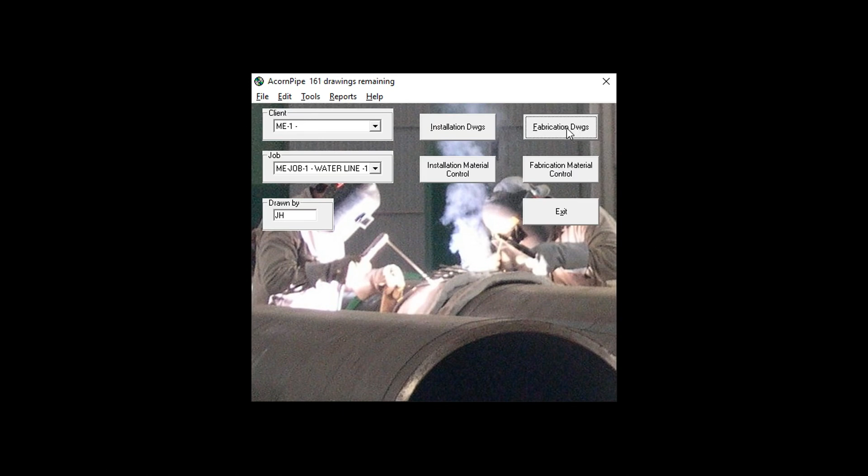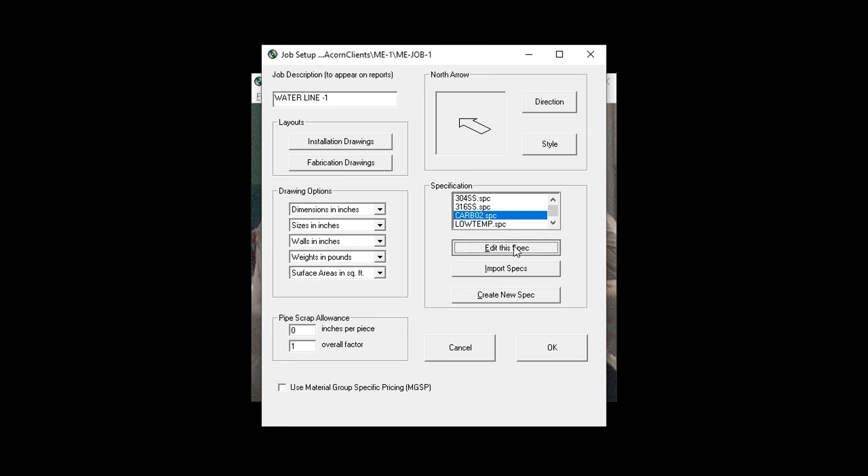Okay, so we created a job before, in another tutorial. I'm going to make some changes here to the spec that's in that job. Edit job spec setup. Now this is something that probably your supervisor would do rather than the operator. So it depends on what your position in this task is going to be. So I'm going to pick the CARB02, edit this spec, and we're going to try a bit of socket weld piping.

Normally, or in a lot of places, your socket weld piping will be the smaller piping, probably depending on where you are, 2" and below or 1.5" and below. And socket welds are a lot cheaper to fabricate, so they're popular for the lower pressure, lower specs.

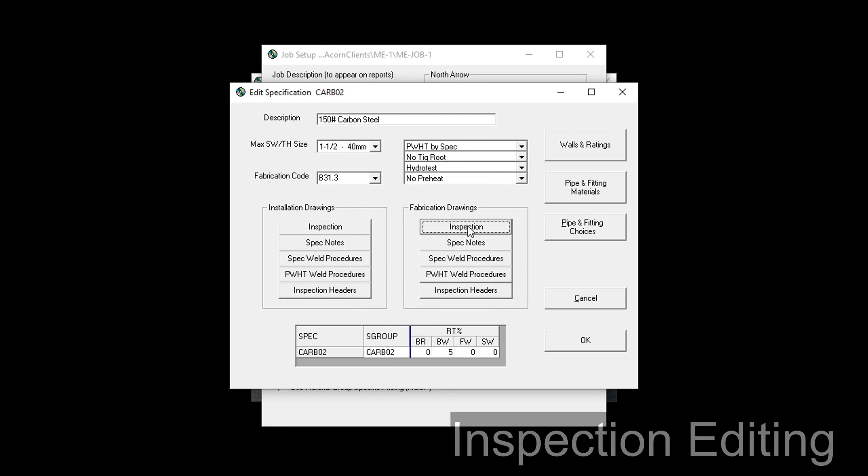So here, click on inspection here. This is something that we didn't do on the last job that we could have done. So inspection, this is going to be your X-ray. Now this is going to apply to everything. You're probably not going to be doing X-ray on your socket weld, although that's not always true. Sometimes they want to socket X-ray the gap.

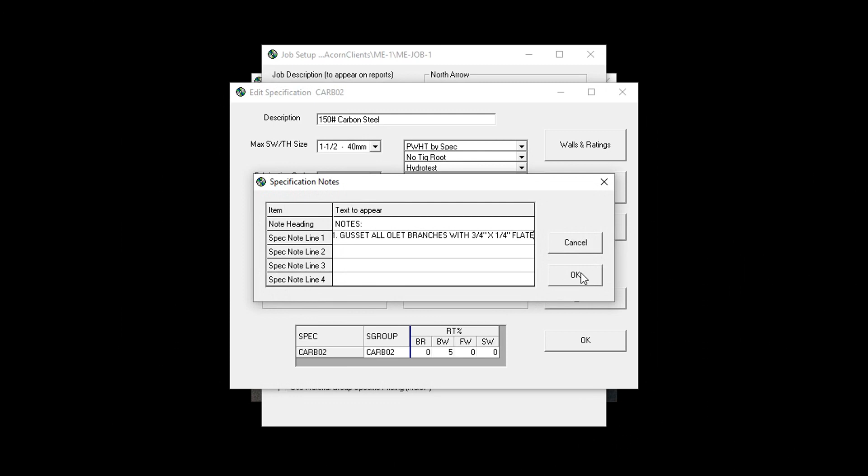So these are things that your specification or the company you're working for would decide for you. You put whatever notes you wanted in there. Spec weld procedures, the company would have determined that. Walls and ratings, generally this would probably be extra strong in most specs. So if we want, we can change that to extra strong.

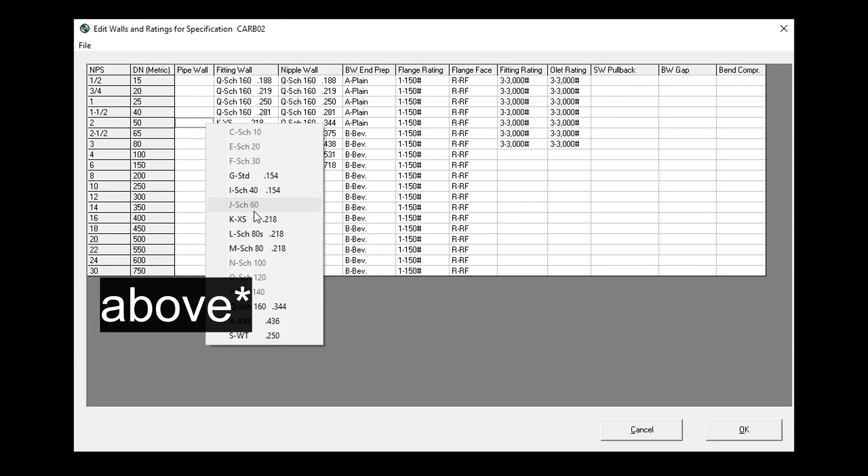Or if you want, you can clear all that. Everything above the size you click will become that. And again, this is probably something your supervisor would do rather than you. And your fitting walls would match your pipe.

Pipe and fitting choices. Most places are not going to be drawing threaded fittings in their shop drawings, but some would. Cross is very uncommon. You can see all your options here.

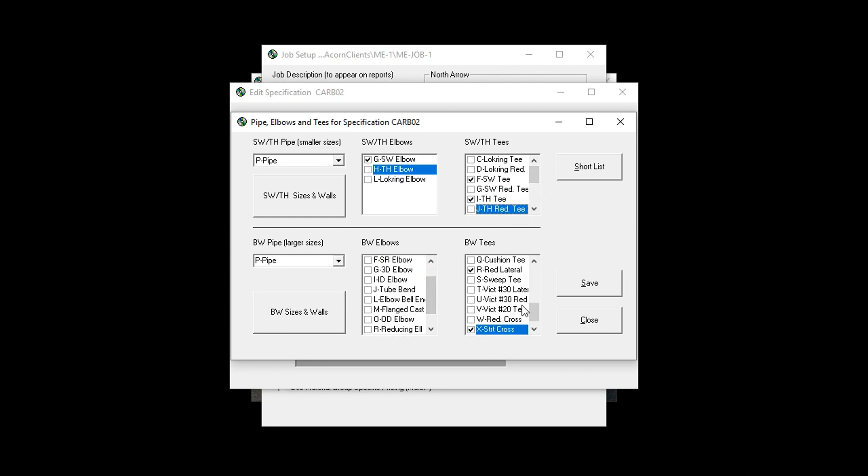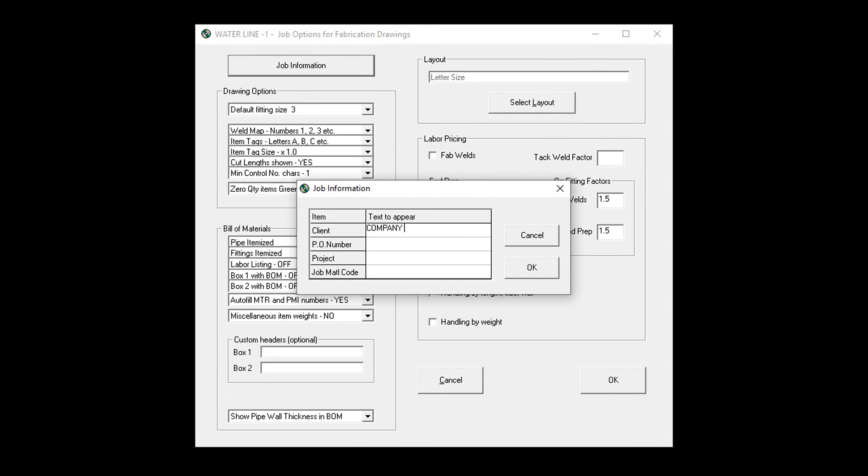Fabrication drawings. We go in here, we can put in the job information. This is all stuff that's done at the beginning of the job, and you wouldn't have to bother with it after that. Okay, so that's some spec setup stuff. So we're going to go in here.

Now, if your design pressures and information are the same on every drawing, or going to be similar, you can relabel a drawing, but that can be a little bit dangerous because you might overwrite a drawing that's already there. So maybe it would be better if we start out fresh.

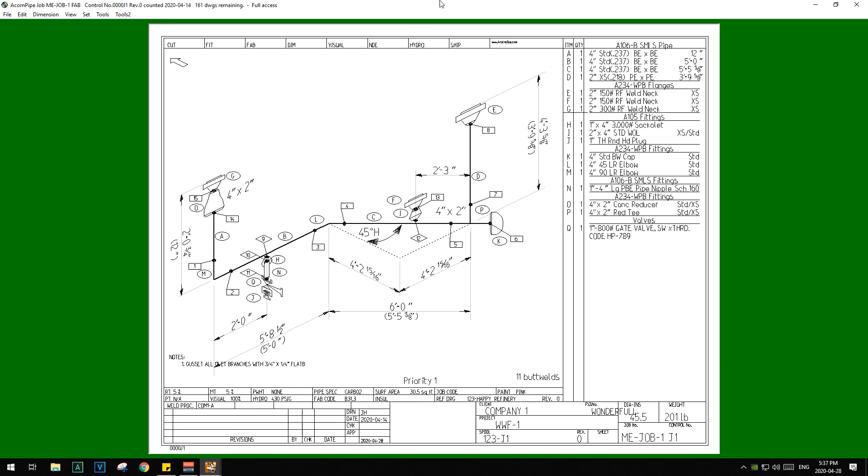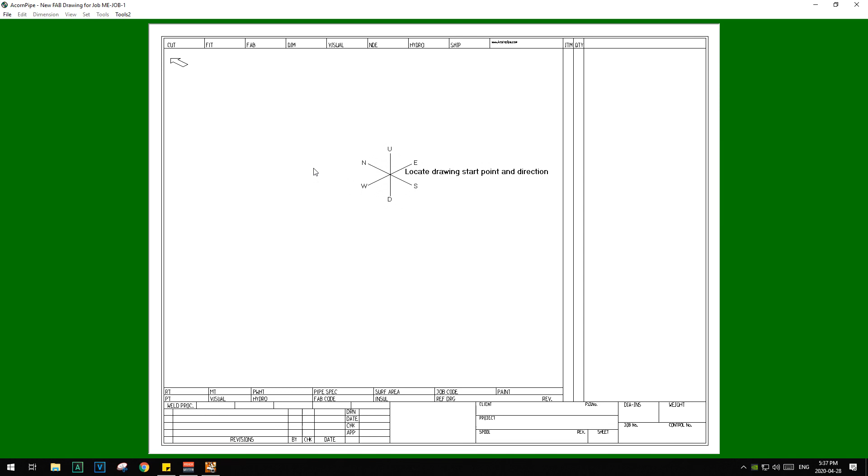So again, we can locate our starting point with the arrow keys. If you want to go on diagonals, you can use the keypad 1, 9, 7, or 3 to run on angles, or 2, 8, 4, or 6 to go horizontally, vertically. You can change your location later, but it's just a general starting point you pick. Once you're happy with that, you press enter. And now it's asking what direction we want to go.

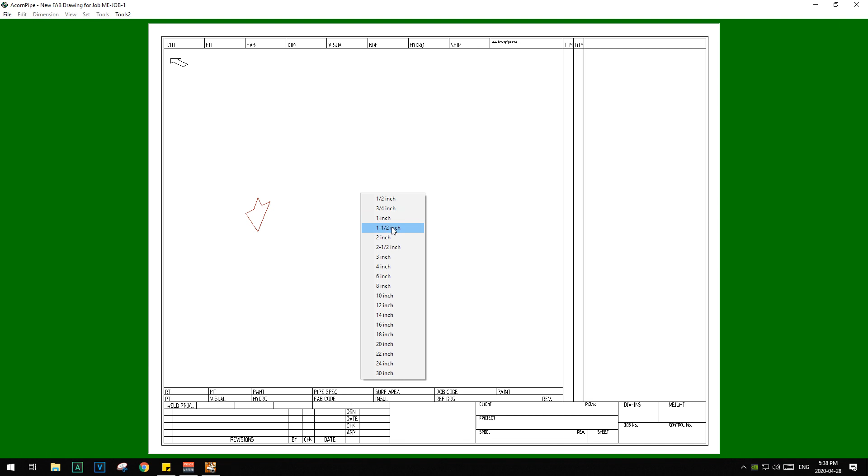We say down. Because this is a completely new drawing, it's asking us which of the specs in the job we want to use. I select that one by clicking the left mouse button. And I'm going to draw in socket weld, so I'm going to start with 1.5" because 2" and above will be butt weld. And again, I'm going to start with a socket weld. It says here socket weld threaded flange, so both options are going to be there when you pick that.

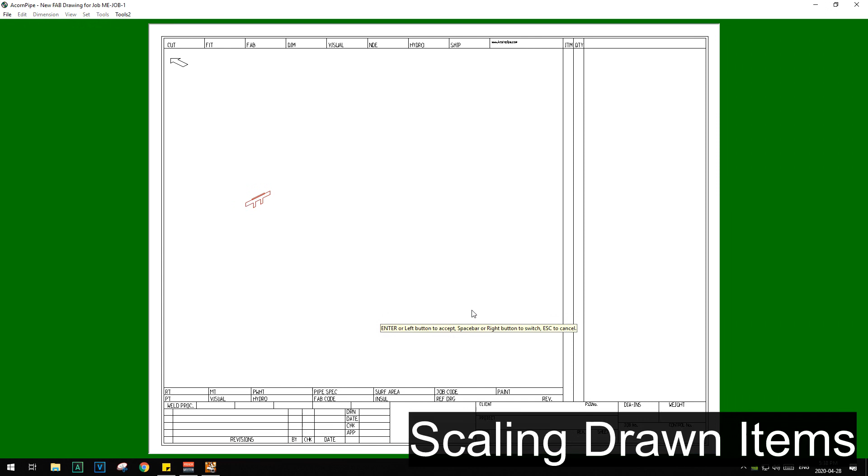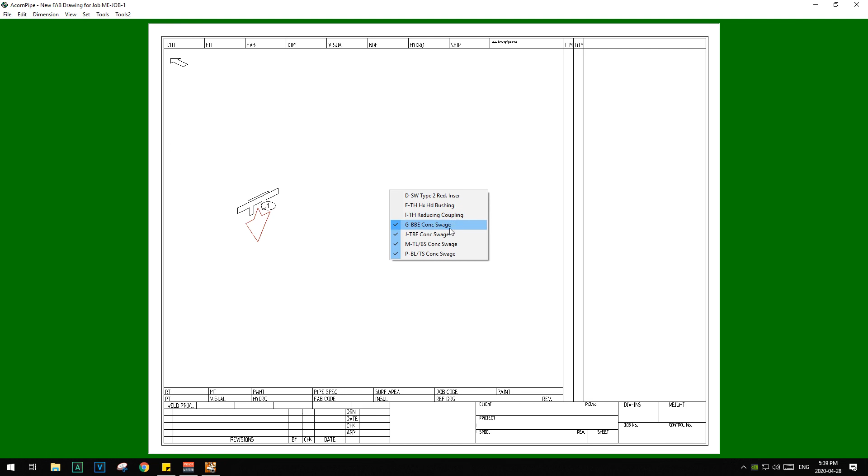So now I'm going to pick socket weld. And I can hold the shift button, up arrow to increase the size, or down arrow to decrease the size of that flange. Reducer. Generally, your fittings are all going to have plain ends in socket weld piping. Now, I don't see a plain both ends swage here, which is what I wanted.

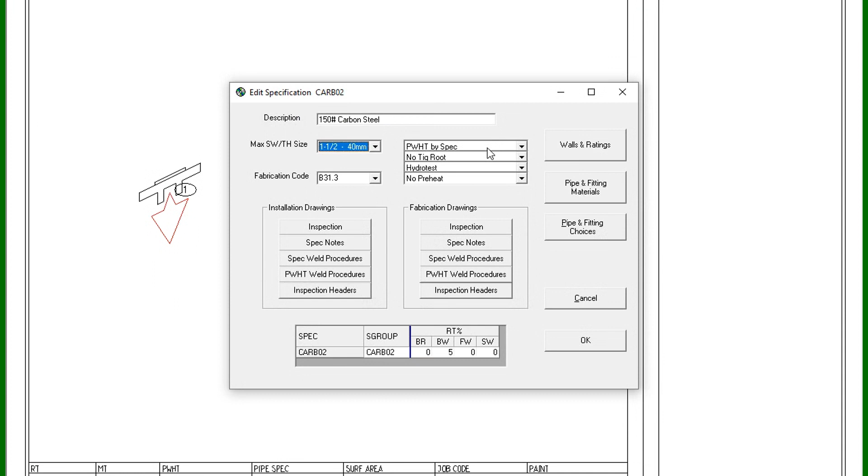So I can go and add that to my spec now without leaving the drawing, and go Tools, Specification, Edit Current Spec. And then I can go into Pipe and Fitting Choices. Swage will be under Reducers. Sometimes where you would expect it to be, like under socket weld threaded reducers, you'll find the item you're looking for is actually under the Buttweld items.

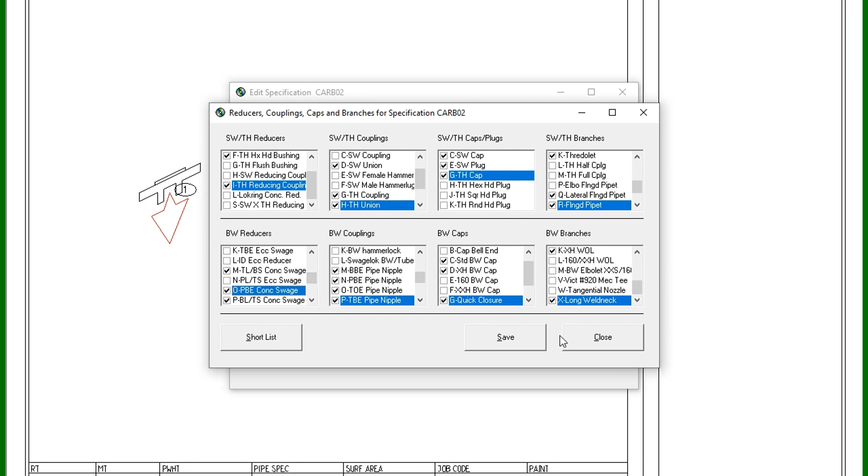So here I'm looking for a plain both end concentric swage. So if I click that, that'll then be offered to me in future in this spec. Save, close, close. Yes, okay. Now another thing I could have done if I didn't want to add it to the spec is just go Edit Off-spec and say all fitting choices. And then for that one command, it would be offered to me. But now I've added it to the spec, it'll be in there permanently.

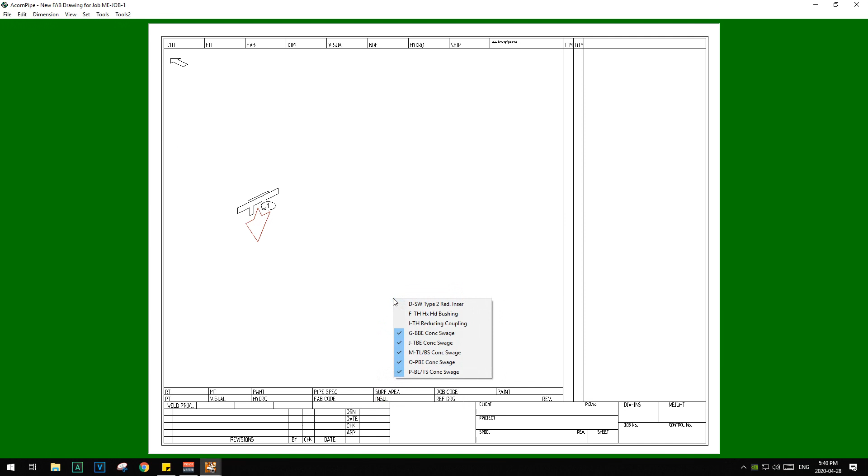And again, I pick Reducer, and you can see now it's added the plain both end concentric swage as one of my choices. And so I've started at 1.5 inches. I'm going to go to 1 inch now. That swage ideally would fit inside the socket of the flange or close to it. So I can increase or decrease my size. And again, I can hit space bar if I want to change the orientation.

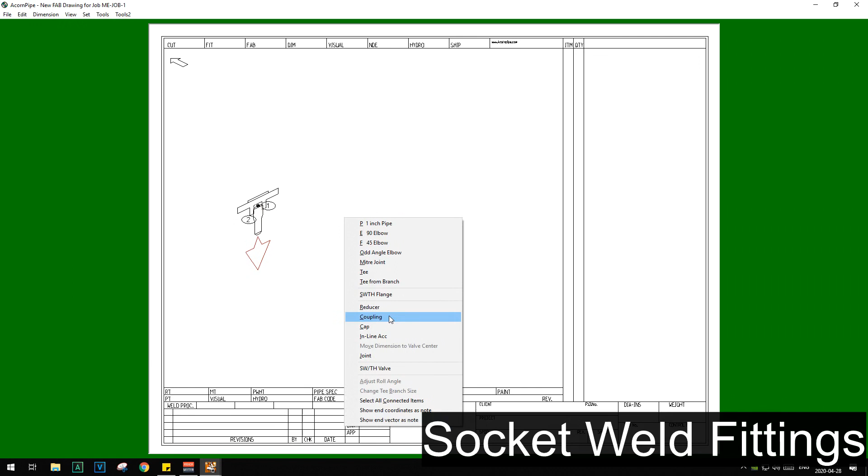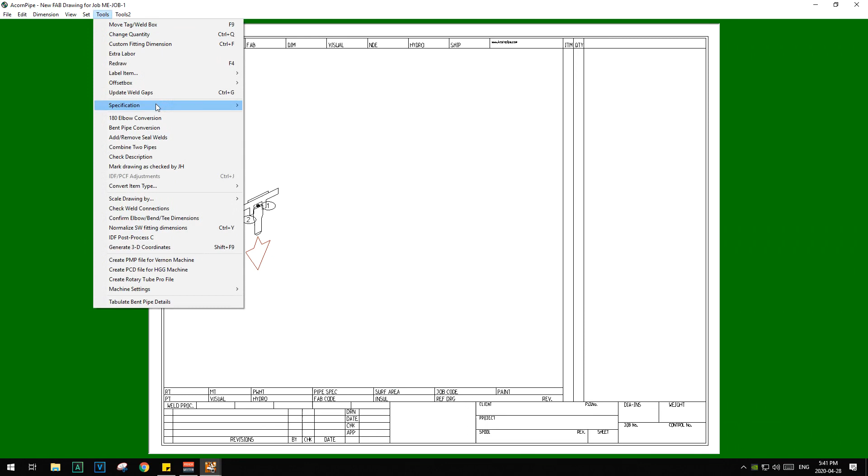With socket weld fittings, you need to be going into a socket generally. So if I'm going to draw some pipe after this, I can't just draw a pipe off the swage according to most of the specifications. I'd have to pick a coupling. Okay, this isn't set up. So again, I can go Tools, Specification, Edit Current Spec, Pipe and Fitting Choices, Reducers, Couplings, Socket Weld Coupling. Okay, save.

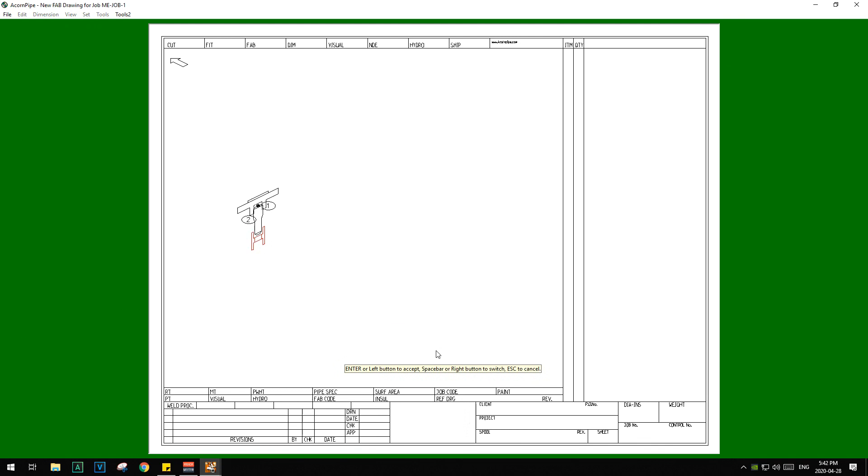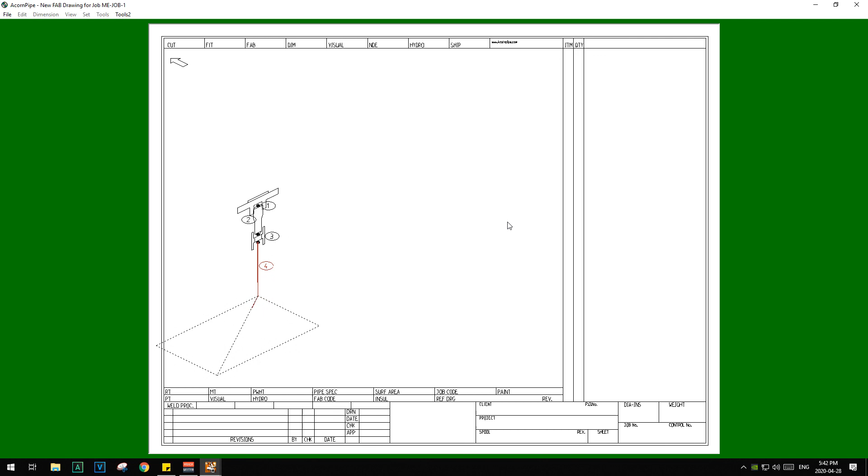Okay, now when I pick coupling, socket weld coupling is an option there. And I'm going to draw some pipe. I'm going to go with a 90-degree elbow, which I can orient at 90-degree increments by hitting spacebar. And if I've gone through all those choices and I'm not happy, I just continue pressing spacebar, and it adds in 45-degree increments to my choices.

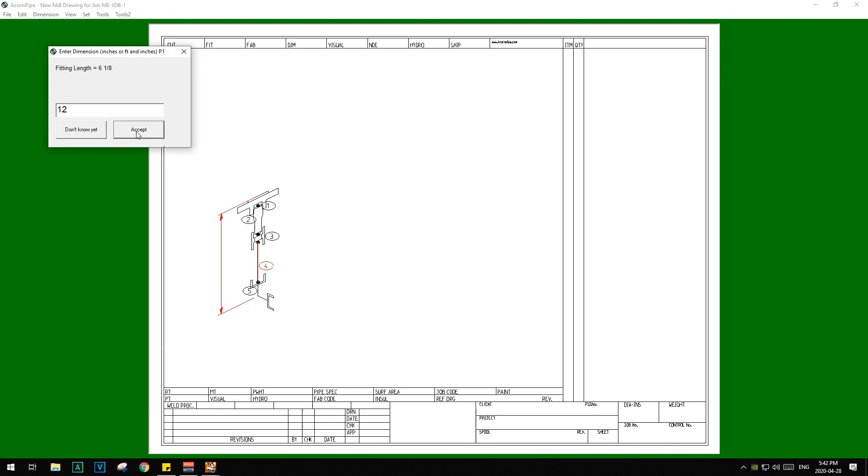And then when I'm happy with the choice, I press enter. It's now asking me for a dimension. And up here it shows me what those fittings add up to without pipe. I'm just going to say 12 inches is my overall dimension. And you see it subtracted the fittings, and it's determined I need 5 7/8 worth of pipe to get an overall dimension of 12 inches. Pipe, pipe. Because there's socket weld elbows, I don't need a coupling to do that.

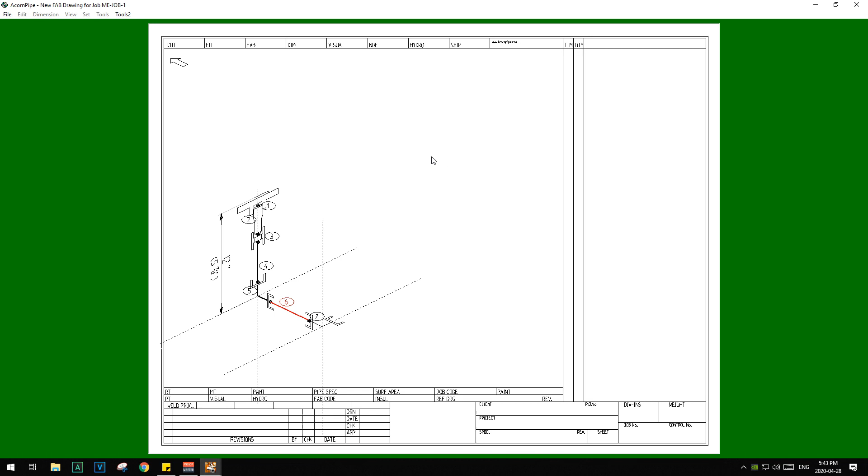Say I wanted to go from socket weld to a butt weld size. I have to put my coupling in here. And now when I pick reducer, I'll see what my choices are. What I'm looking for is a beveled large, plain small end reducer, which is not there. So I'm going to go Tools, Specification, Edit Current Spec.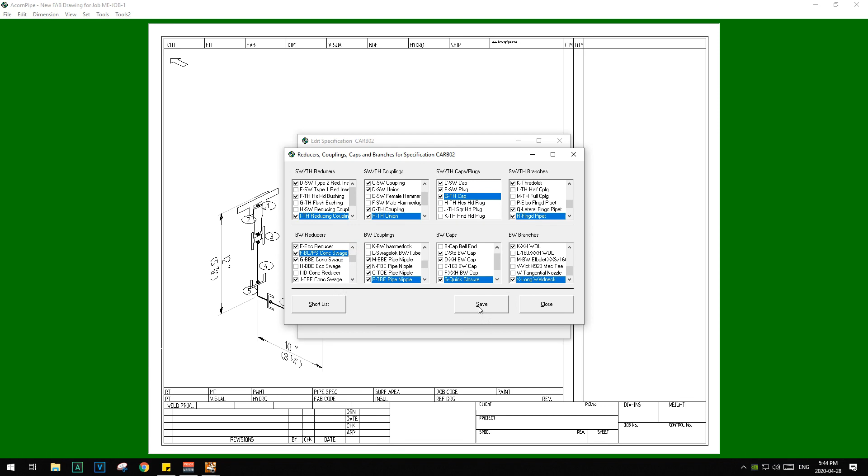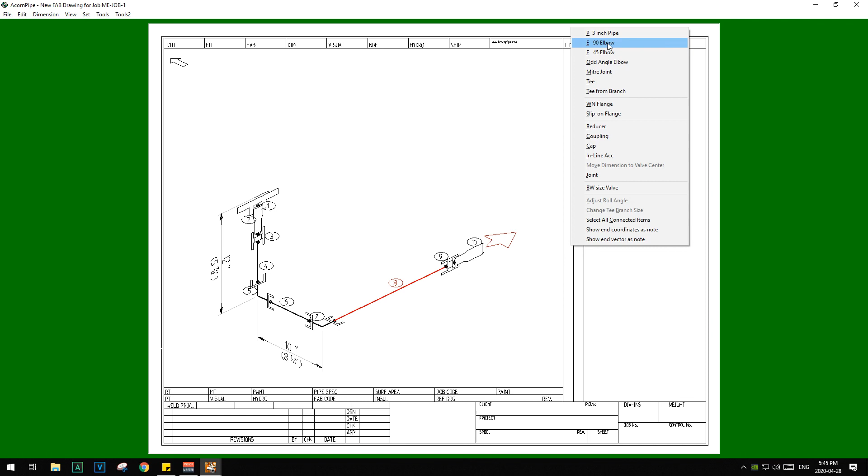Let's say I'm going to go to 3-inch. And now when I pick a 90-degree elbow, because I set in my spec that 1.5 inches and below is socket weld, it knows that 2-inch and above is going to be butt weld. So it's automatically chosen a butt weld elbow for me. I'm going to hold shift and up arrow just to make that elbow look a little bigger. You don't have to do that. Some companies don't really care. Most companies wouldn't care.

Okay, so now I'm drawing in 3-inch. And if I were to draw a pipe, I wouldn't need a coupling because you don't need couplings with butt weld piping.

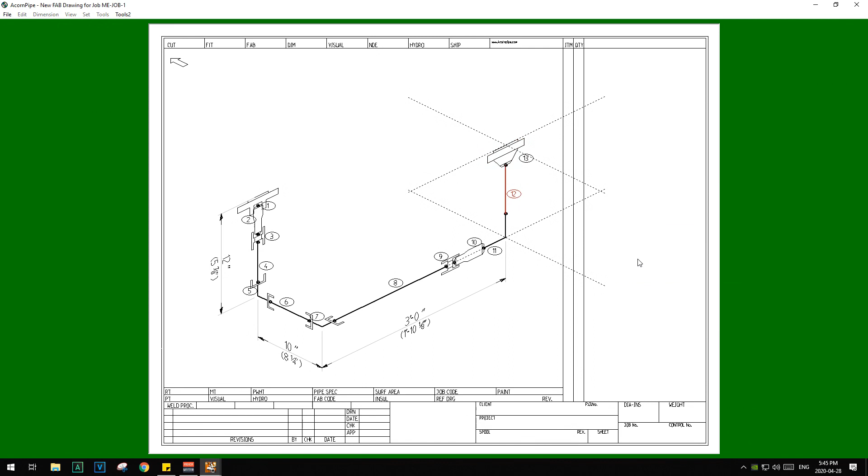Okay, so now if I go File, Resave, it says Resave, but it's actually the first time I'm saving it. So it knows that I've already used J1, so I'm changing it to J2. But just be careful there. It'll give you a warning if you're starting to overwrite a drawing. Always be careful if it's warning you that drawing already exists, as many a times drawings have been overwritten by accident. So pay attention to any warnings it gives.

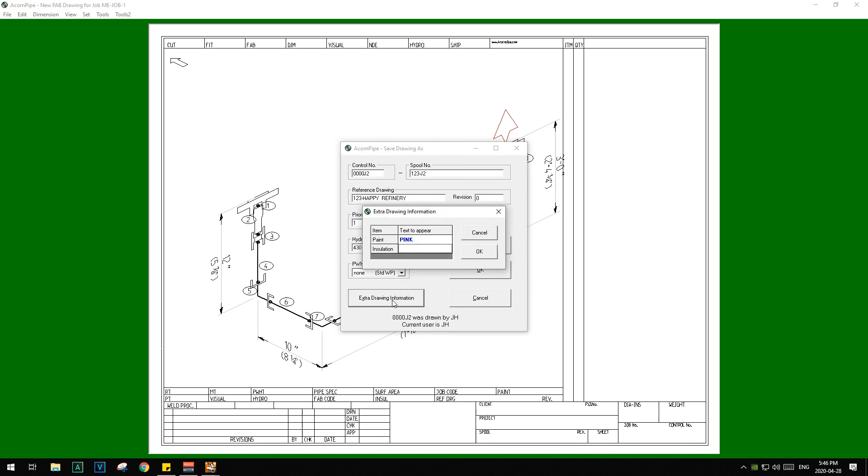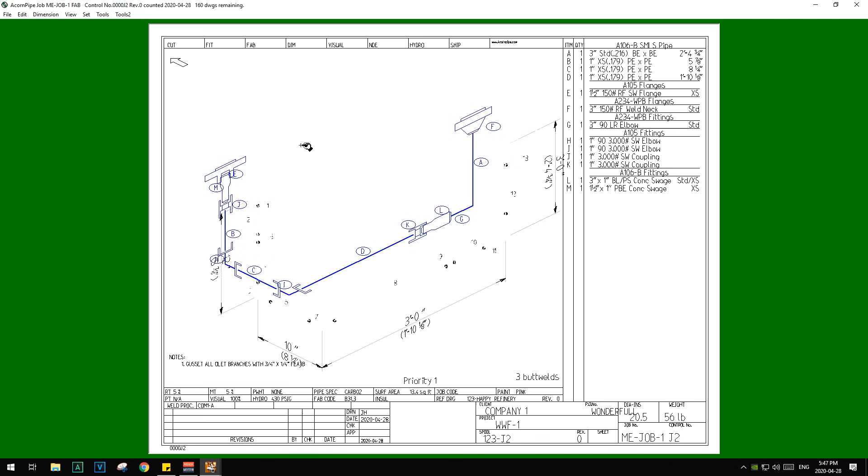Now, that's a little uncentered. So I can go Edit, select all of the above. And again, with my arrow keys, I can move it. By pressing 5 on the keyboard, I can make the moves bigger or smaller. And if I want to move the dimension line a little bit, I just click on the arrowhead. If I want to change what the dimension says, I click on the center of the dimension.

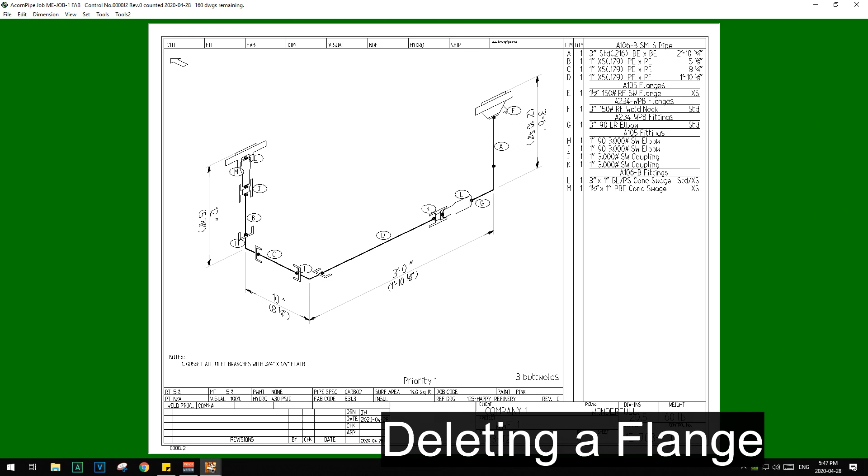Okay. So the cut length there is 2'10 3/4", and it's chosen 150-pound flanges in this spec. The overall length is 3'6". So let's see what happens if I want to delete that flange. Perhaps I meant to put a 300-pound flange there, not a 150, because I want it to go off spec.

If I use F11, see, the cursor becomes a hand here. So I can click on that item, click on the item bubble. You don't have to click on the flange, click on the item bubble, and then hit delete on your keypad. Now I'm going to go Edit, Off Spec, and I can change any of these things so that I will be prompted on the next command for what I want that's not per spec. So in this case, I'm going to change the flange rating.

Say done. Now when I click there and I pick weld neck flange, it's asking me what rating I want because it knows I'm going off spec. I'm going to say 300 pound.

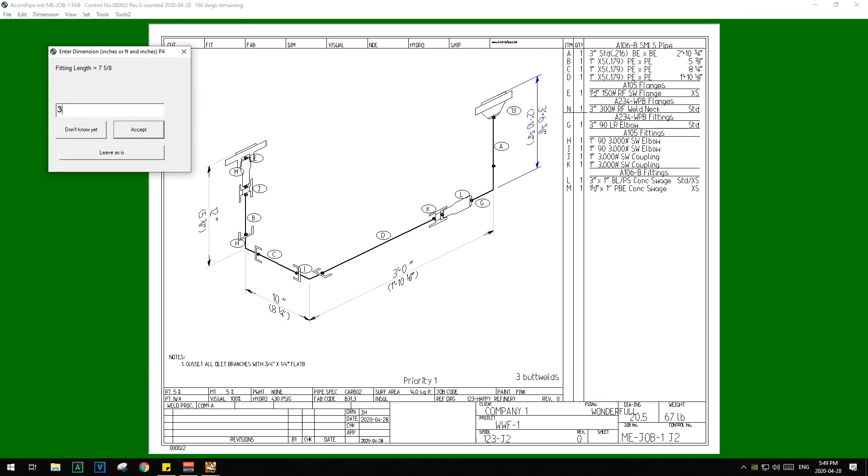Okay, so it's retained the cut length, but it's increased the overall dimension. So be careful there. If you do what I've just shown you there, it's going to keep the cut length the same, but your overall dimension is going to increase. So if you really did want the dimension you put in there originally, you'll have to change that to whatever you had originally. And myself, if I've got 2 different flange ratings on the drawing and it's out of spec, it helps to bring it to the attention of the guy in the shop.

Again, each company will probably have preferences on how they want to do these things. For the swage, I could call that out. Again, I move it with the keypad when it's in this state. And I can hold shift and increase or decrease the size of the text while it's in this state. I like to save my drawing once in a while, just in case things go bad.

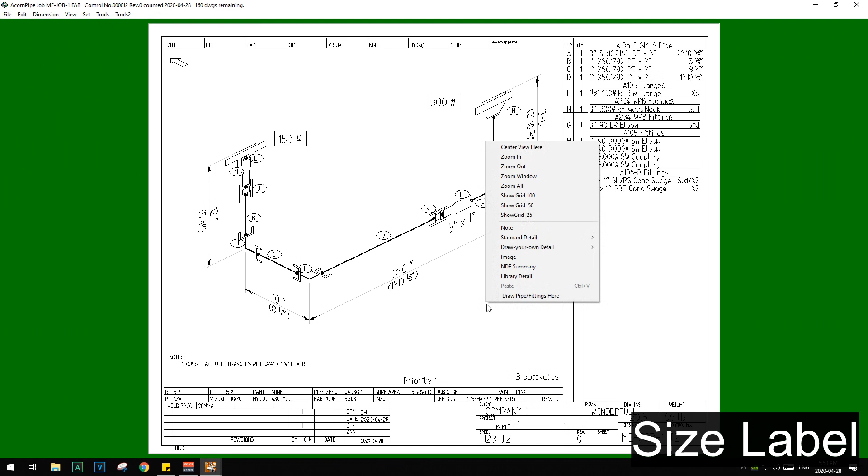So I did the note by just right-clicking on the screen somewhere and choosing Note. You could also call out the size of that reducer by going Tools, Label Item, Add Size Label. And then when I click on that item, it'll automatically come in with the size. In some cases, you might have to move things. F11 doesn't always move it. It seems to work with these notes if you want to move them.

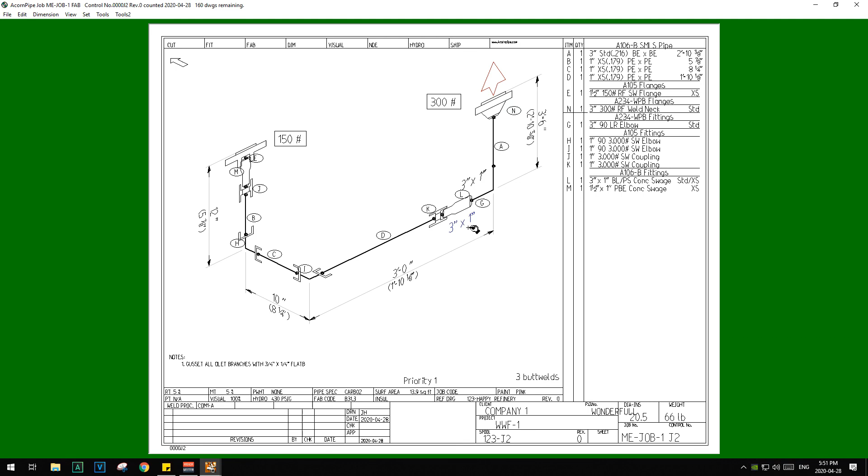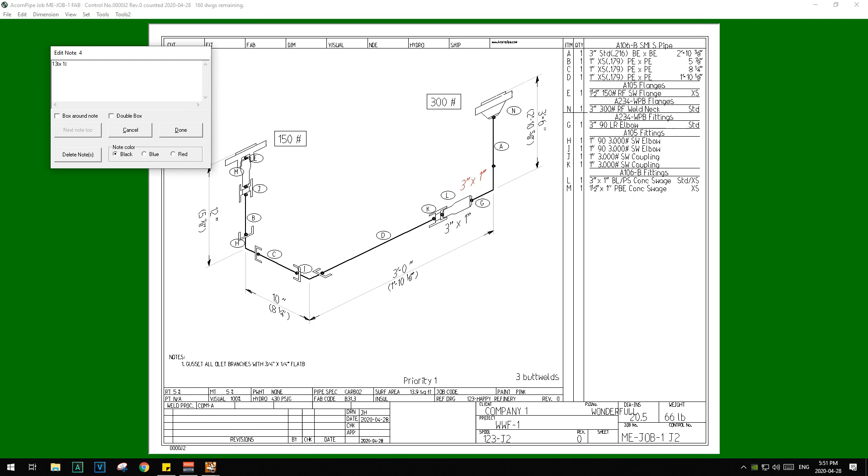But the note that was put in by the computer, first I'm going to move this bubble out of the way. Tools, Move Tag. Seems like the notes the computer put in, I had to hold Control and left mouse click to get that to come up. So sometimes it's easier just to type the text in.

Now let's just say I'm putting a branch on this. Socket-weld branch. 18 inches, or I could type 1'6". Now if I was to go 1'-6", see this change to the word calculate. So it's going to subtract 6 inches from 1 foot if I put that dash in there, okay? If I put 1'6" without the dash, it'll accept that.

So let's just say I had some long calculation. I could say 1'7" plus 3 space 3. No, I don't want to do this slash 3 point. So then it can calculate. Well, let's just say I'm going to add 3 inches. So it calculated that, accept.

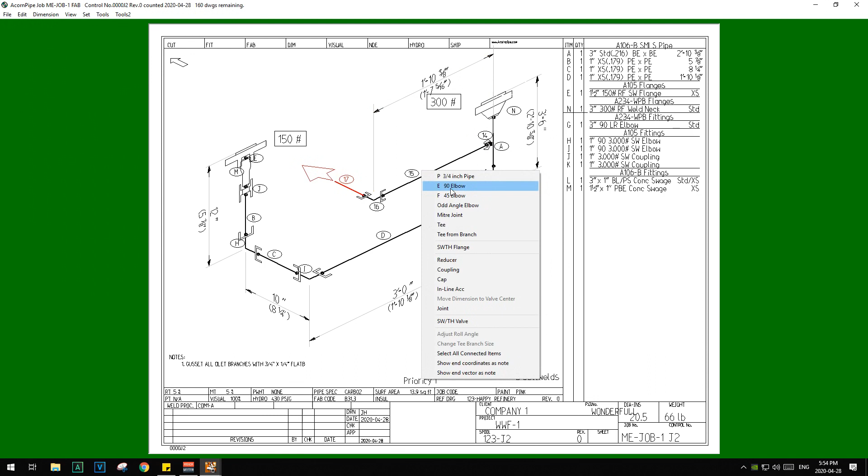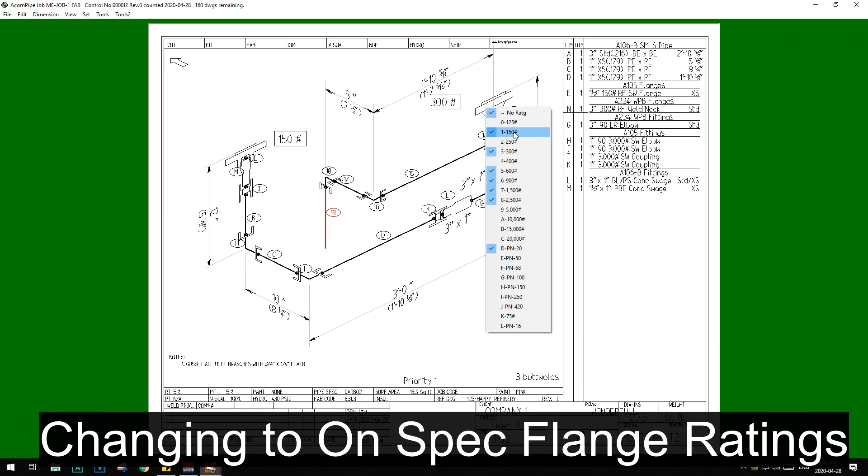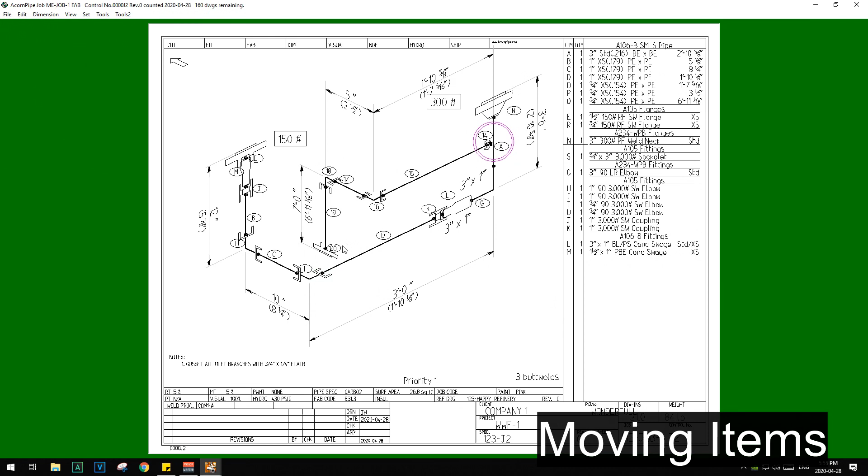Okay, because I'm still in edit off spec with the flange rating, it's still asking me. Edit off spec, I'm going to take that off. Or I could just say all on spec, but anyway. So now it won't ask me the flange rating anymore. Now, if I hit F11, I can select certain items that I want to move. In this case, I'm going to move them diagonally with the number 9 on the keypad. And then press enter when I'm satisfied with that move.

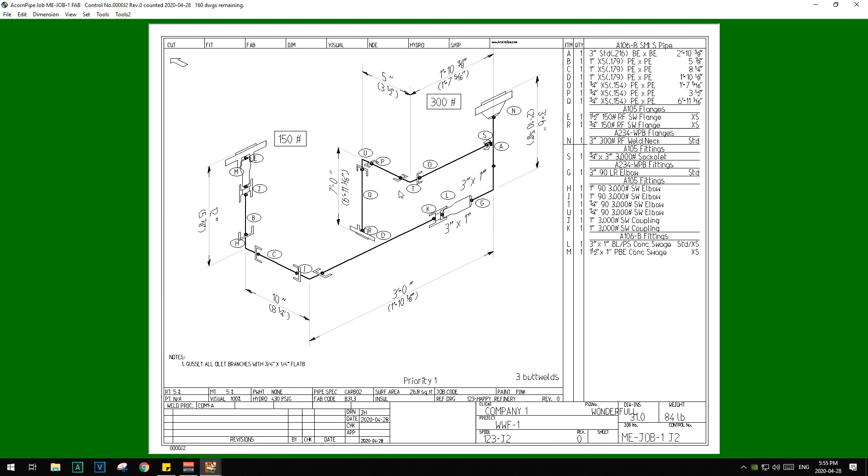And if I was going to draw this so it came down, say I just wanted to for some reason. Isometric drawings are not to scale, so you don't really have to do that, but I'm just going to show you something. So if I had lines crossing like that, and I wanted to break this line here, I can click on that line and say break pipe. So my second click is going to be where the other end of the break is, okay? And then if I didn't like that, I can click on the line again, say unbreak pipe.

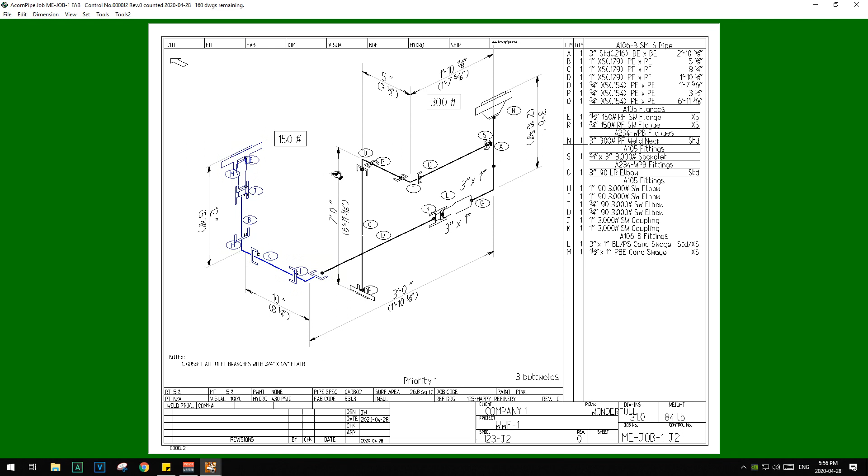F11. Break pipe. Okay, but actually in most cases you probably wouldn't bother with that. You'd just have this showing up here.

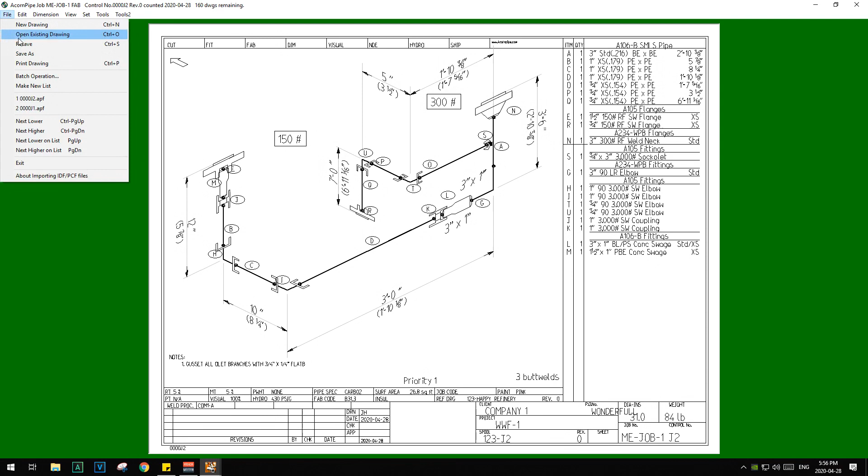Now say on this elbow here, most common way is to do what's called a dummy leg or a stanchion. So I click on that elbow, pipe dummy leg. Now here's my choices. A dummy leg is just going to be a chunk of pipe that's welded to that elbow. I got a 3-inch elbow. I can either have that dummy leg come with its elevation the same height as that elbow, or with the elevation of the bottom of the dummy leg the same as the bottom of the elbow.

Say I'm going to make it so the bottom of the pipe is the same. I'd go dummy leg outside flush and make it one size smaller than the elbow perhaps. Depends on the spec. So this pops up. Looks a little small. I'm going to shift, make it bigger. Press enter. If I'm satisfied there, then I click joint, okay? I know there's no joint, but that's what you do to get a dimension to come in there. And plain end, in this case. Now I got a dummy leg that's 3 feet.

File Resave updates the bill of material. The dummy leg is item... Okay, these item numbers are getting all messed up now. So I can go Edit, Reset Item Labels. Okay, so M is the elbow, V is the pipe that was used to cut that dummy leg. So it gives the pipe fitter the information he needs to cut that in a way that will fit the contour of the bottom of the elbow. So then that would be sitting on steel or something and it would support that end of the piping.

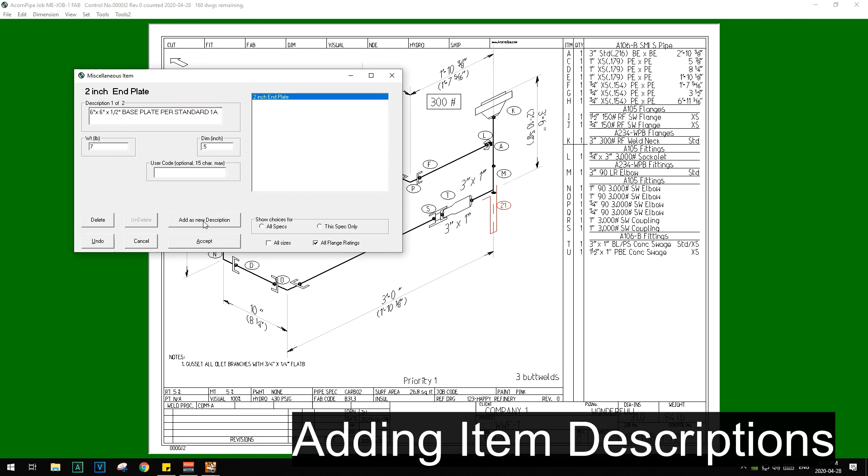Okay. Add as new description. If I just said accept, it would wipe that out. Add as new description puts it in, so I'm not wiping out somebody else's description that they might want if they're using the same database. And then accept.

Okay. Now I've in words told it that it's square, but you can space bar to make it round or square depending on what choice you wanted. Now I press enter. Now it still hasn't given me a dimension. I've got to click joint before it'll give me a dimension.

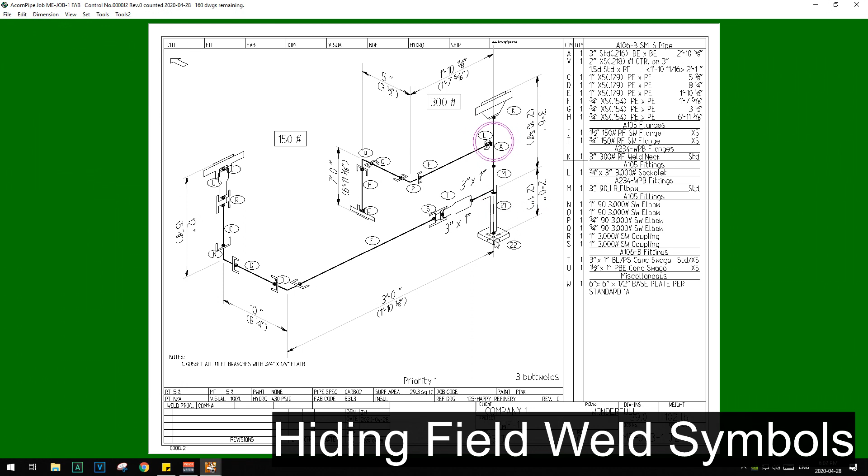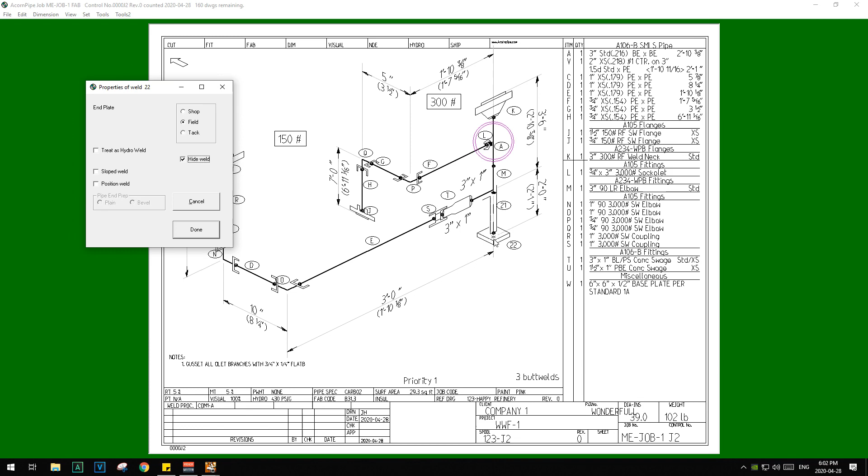Now there's a field weld symbol there. Obviously I don't want a field weld there. So I can hold shift, click on that field weld, and this box comes up here. I can click hide weld. This is referring to the imaginary weld underneath the plate here, which I'm not going to have. I suppose possibly you could if you're putting an anchor of some kind, but I've never done it in this situation. So then I say done. Resave resets my item numbers, or shows them.

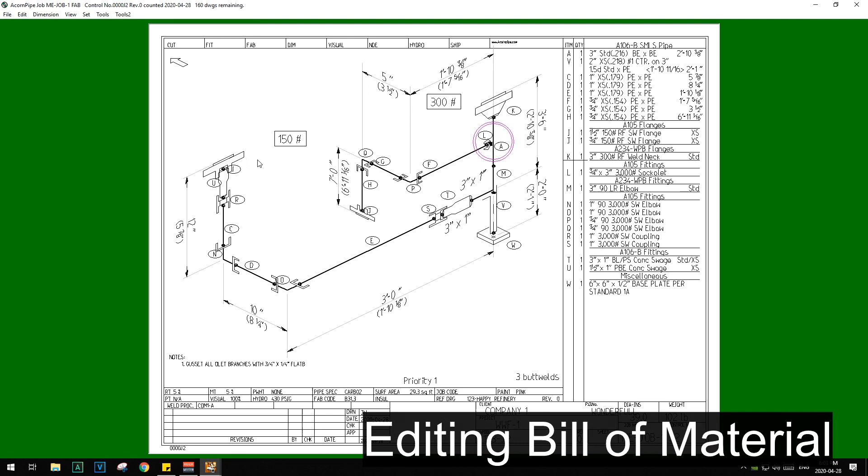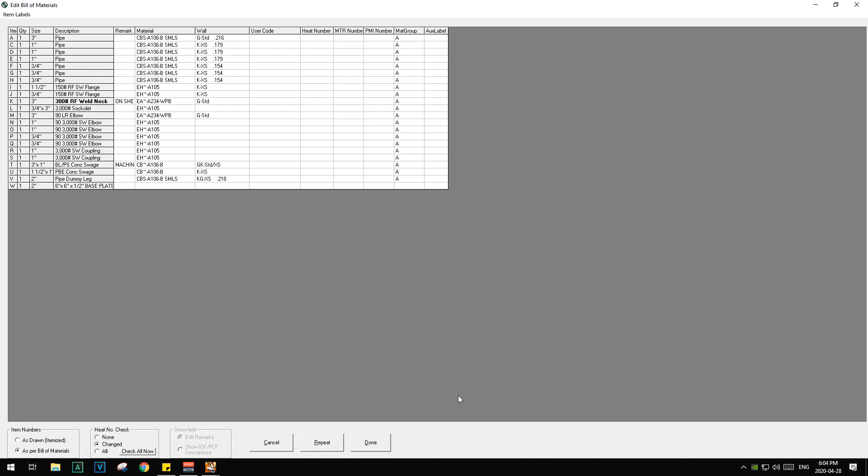Okay, so now here's that base plate that I described. Say there was something I specifically wanted to say about one of these items. I can go Edit Bill of Material. It's got all the items on my bill of material here. I can put in a remark about them. Okay, so you can add comments in there. And when you're happy with that, done. And when I go File, Resave, those comments will come in: on shelf in warehouse, machine from Sked 80 in shop. Maybe just additional information that somebody might need to know.

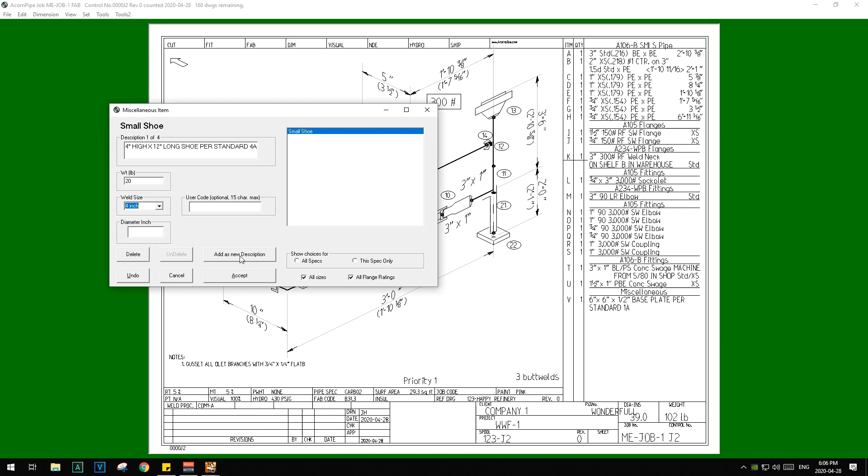Say I want to put a shoe on here, support shoe. And click on there, attachment, small shoe. Now here you can pick your weld size. Your estimator could probably help you determine what would be an appropriate weld size there. Add as new description, accept. Again, the orientation using spacebar.

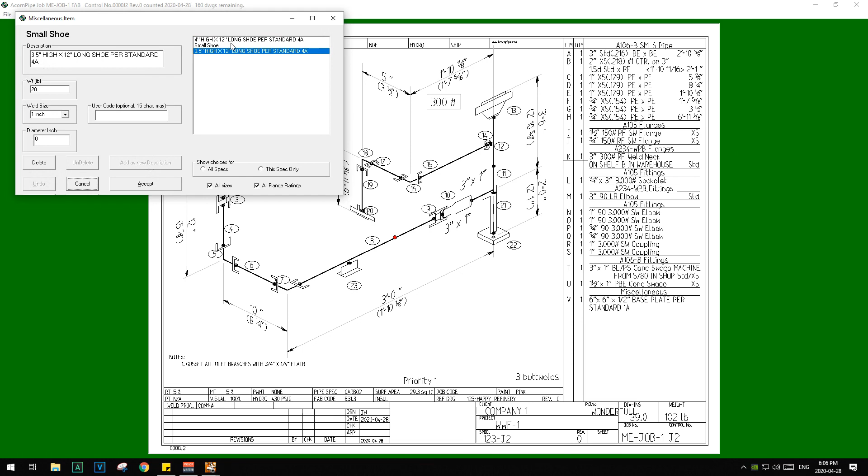Now next time I go to add a shoe, the description's already there for me to pick. If I wanted to, I could change the height, and then say add as new description. And so it's not wiping out the old description. Now say I want a dimension along here. I want to locate that shoe. I can go dimension miscellaneous.

I can just do that to make it look a little prettier if I want. Tools, move tag. Just make it look a little more presentable. Make sure your arrows, or your item bubbles, are close to the item that they're representing. You see this red circle here? That's warning me that I haven't located that item. A lot of times if commands get hung up, just go File, Resave. It seems to reset something there.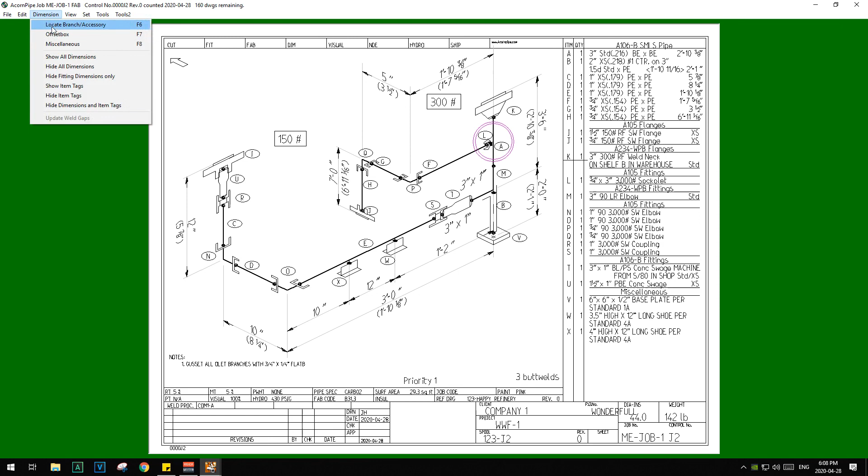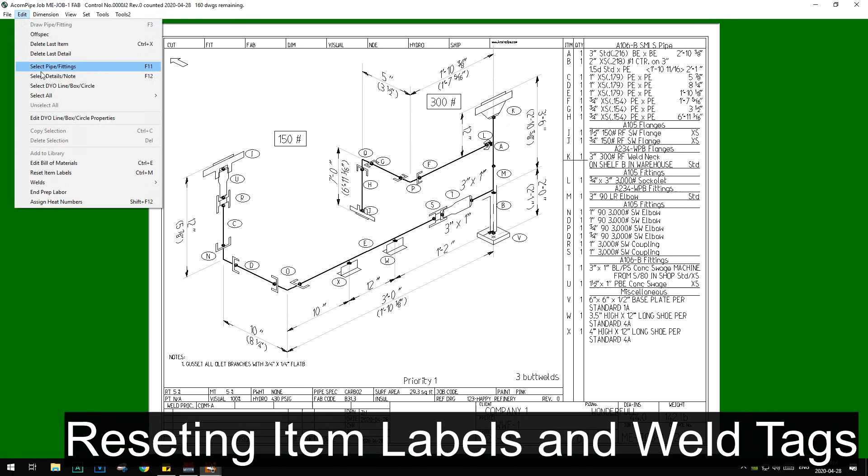I can right click and it'll change the way that dimension is going to be represented. Okay. Edit, reset item labels. And now I'm going to do edit welds, reset weld tags. If the drawing's never been issued before, you can reset weld tags. If the drawing has already been issued and the QC department's already taken seriously the weld numbers you put on the drawing, then you'd probably use show weld map and it would pick some. If you made a change, it won't overwrite numbers that have been used on welds already.

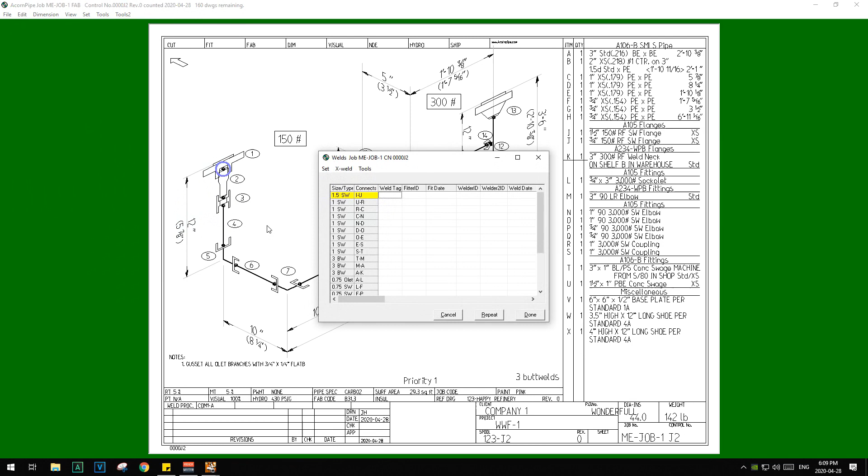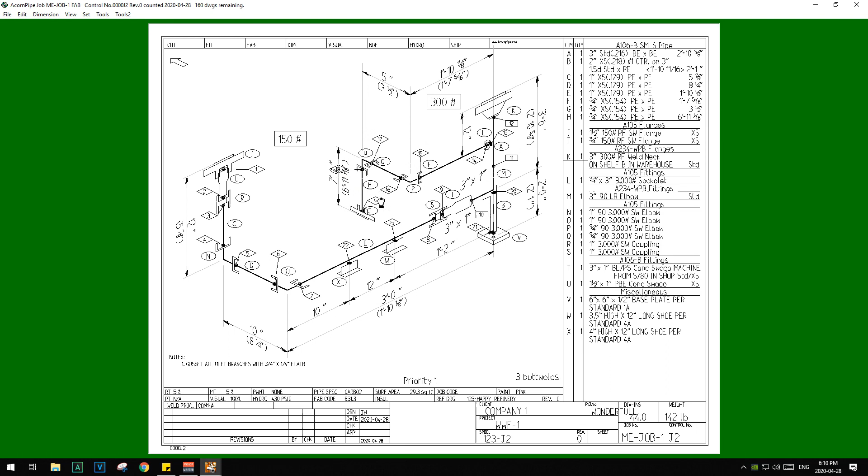Edit weld tags, or sorry, no, edit welds, reset weld tags. Yes. And then again, let's do some cosmetic cleanup there. Acorn seems to do a pretty good job, it just needs a little tidying up, which is a piece of cake. Once you get the hang of it, it goes pretty good. I don't like where that is, so I'm going to F12. Seems like the bottom left corner seems to kind of select things.

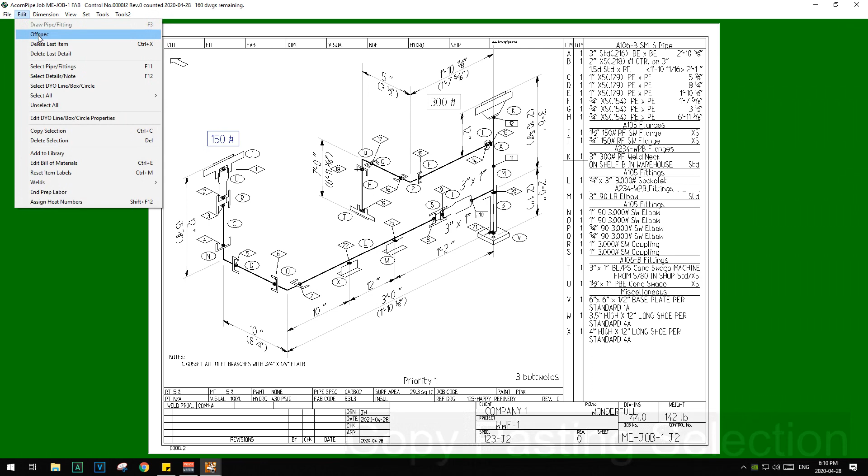And I could also F12 because I need to identify this flange also, right, if I'm doing this. I can F12 that item, put a box around it, edit, copy selection. And I right click here, say paste.

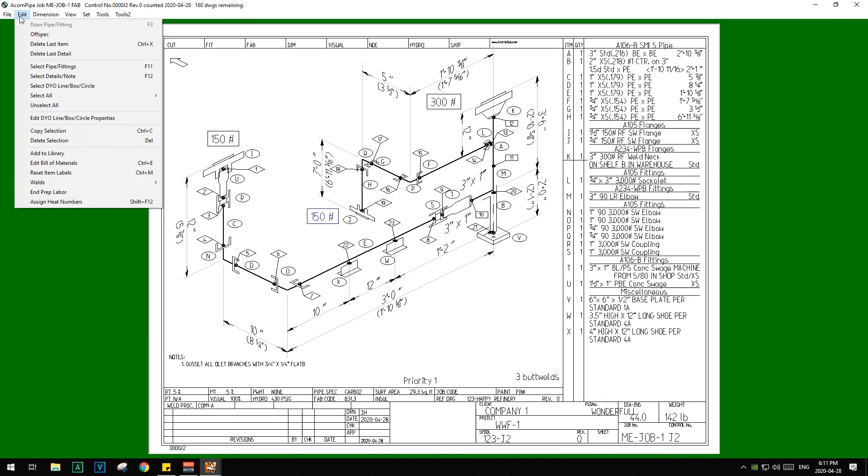If this drawing had perhaps already been issued and I wanted to revise it, I could go edit, or sorry, file, save as, and here I would say new revision. Revision 1. Made it even better. Which is hard to believe that that could be done.